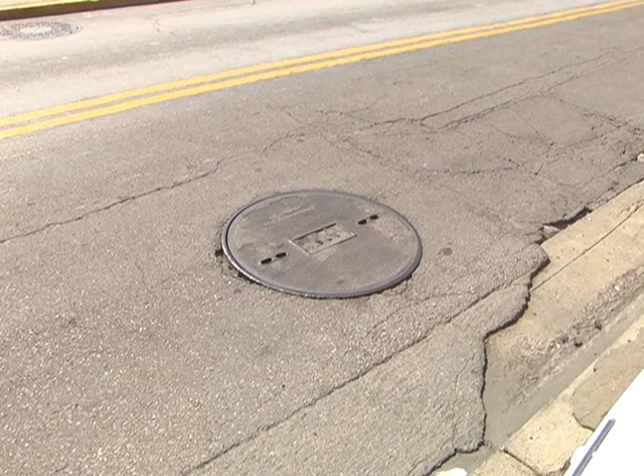When the Rupp Arena Task Force took a look at the arena and the district around it, one of the recommendations of Space Group, the planning firm that put together the master plan, was to restore and revive the Town Branch as a central part of downtown.

Picking up on where the task force left off and where that plan left off, the Downtown Development Authority invited qualifications from firms all over the country and the world to look into this issue for us. We had such a great response that over 20 international and national firms responded, so we pivoted a little and invited 5 of them to participate in the design competition.

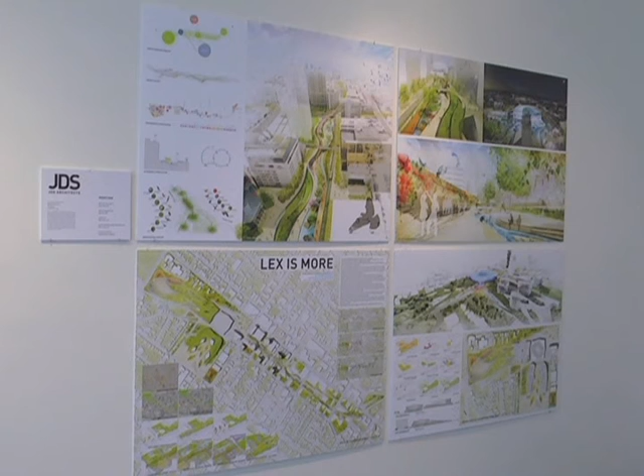They were given the brief in early December, and by the beginning of February, we had in our hands 5 exciting proposals for conceptually what it would mean to bring back the Town Branch downtown. The proposals ranged from putting the creek itself above ground in one continuous flow through the city, to reinterpreting it in various moments, to some massive architecture. But in the end, where we landed was Scape, a landscape firm out of New York City, which partnered with local firm EHI Consultants.

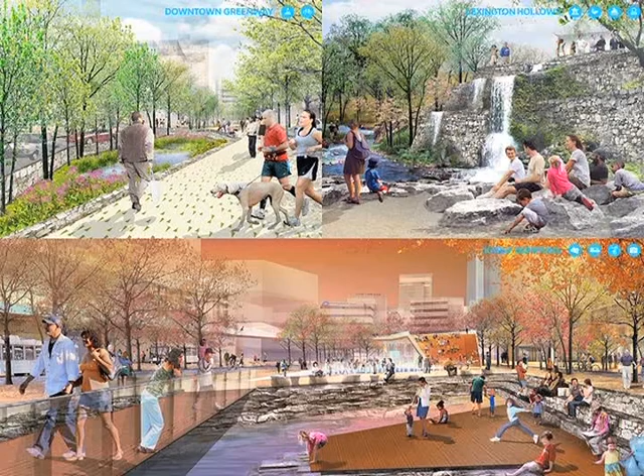They had 3 things that really pulled it all together and were the key pieces for why they rose above the rest of the competition. One was that they based the entire design on the karst limestone geology of the Bluegrass. The Bluegrass is a series of sinkholes and caves and springs, and creeks in Kentucky usually pop out of a spring, run downhill, dive into a sinkhole, and then reappear somewhere else. That mystery of water formed the basis for what they designed.

The second is that more than just create a pretty landscape feature, they actually designed a piece of green infrastructure. What we mean by green infrastructure is that in addition to creating spaces we would want to be in and tying the downtown together, this will also filter, clean, and manage stormwater in a way that helps the system and returns clean water back to our creeks. So in addition to creating great space, it has an ecological function as well.

And then finally, their design seemed right-sized for Lexington. We're a mid-sized American city, and they gave us a concept that could be implemented in phases, that was manageable, something that seems eminently doable, because almost the entire scheme is on either public right-of-way or public land. So there's a real opportunity here to pull this together and imagine that this is something we might actually build within the foreseeable future.

Isaac Murphy Art Garden at the top of Midland Avenue at Third, where Third turns into Winchester, near the Jif peanut butter plant. That's really the headwaters for the town branch. There's a spring near the peanut butter plant, and that's where the water first emerges.

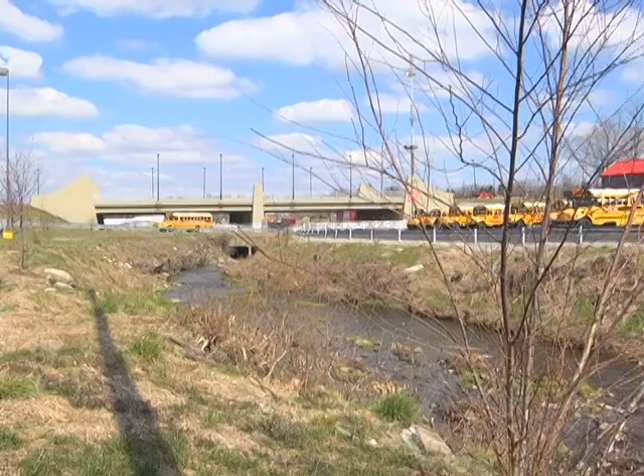The thing to remember about Vine Street is that it's at the bottom of the hill in both directions. So you've got rainwater running through downtown, through the neighborhoods, down to Vine Street and into the town branch today. It's just that the town branch happens to be underground. So the headwaters, though, are here at the top of Midland.

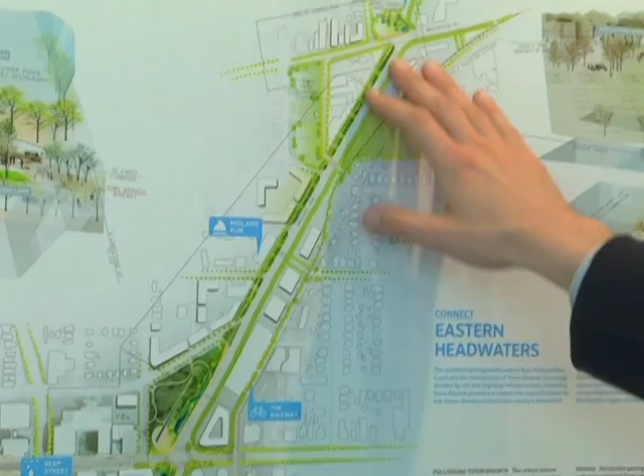The idea is to take the wide right-of-way along Midland and create what we think of as a typical creek—shallow, not particularly wide, but at wet times of year there'd be a lot of water, and at dry times a little bit of water. This would create a linear park, tie into the Legacy Trail, and set up a connector between the Legacy Trail and a bike path that would eventually tie into the town branch trail. So in addition to cars, you can now walk and bike this section of Midland.

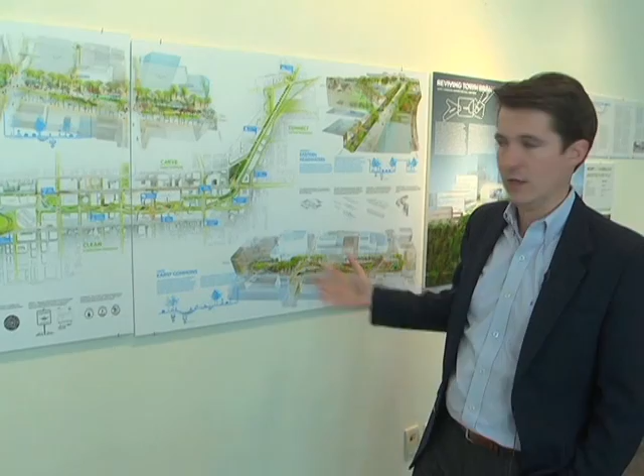It turns the corner around Main and Vine, maybe appears as a little bit more of a pool here. Then we get into what they call the Carve, probably the centerpiece, or one of the two centerpieces of the design. The idea is that what is now currently a parking lot along Vine Street, across from the Transit Center, behind the Kentucky Theater and the library and the Government Center, would be turned into a world-class public space.

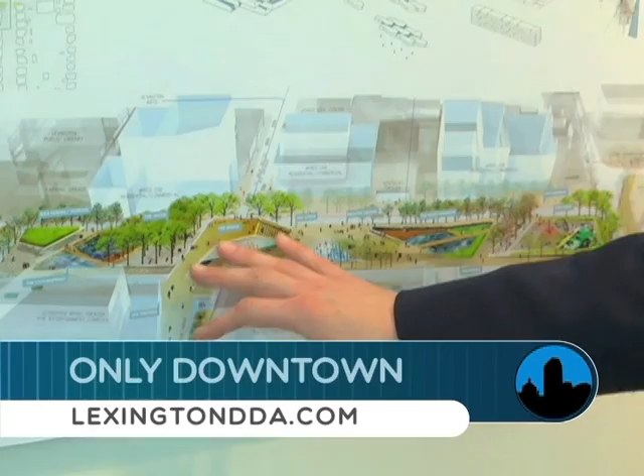You'd have playgrounds, a splash park for the kids, and what they call the Karst window, where you would actually see the creek flowing underground. There's also taking out the Martin Luther King overpass and turning it into a pedestrian overpass so that you create a bookend between downtown and UK along MLK.

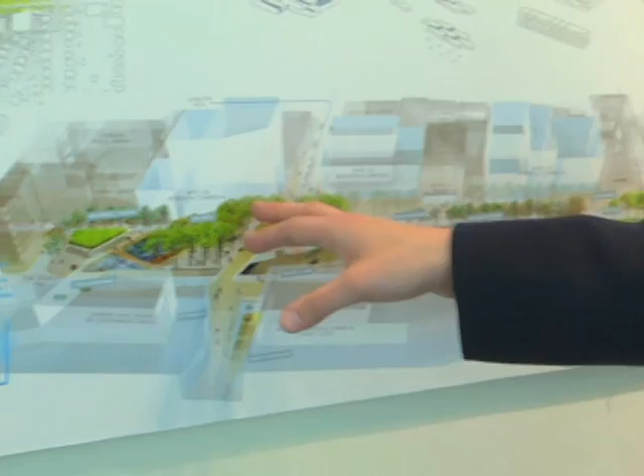Really taking what is now lost space and the backs of buildings and creating a world-class park that also provides economic development opportunity overlooking the park.

Down Vine Street, the design really takes into account the fact that Vine Street right now is kind of a speedway, and that much of either side of the street is dedicated to either parking lots or parking decks. So the idea is to create a median that would continue this pedestrian bike path along Vine Street.

Until we come to the renovated Rupp Arena site, incorporating the existing Triangle Park, coming around, and then the water ducks back underground and emerges dramatically as a waterfall behind Rupp Arena, opening up into this field that we don't have right now.

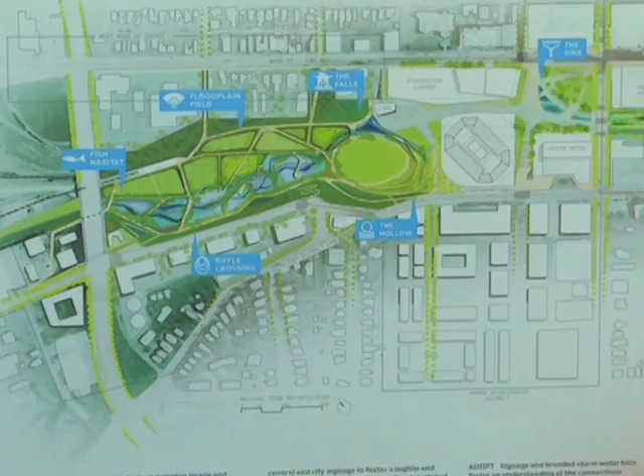It's a beautiful interpretation of the Cox Street lot, which is currently a giant parking lot, but a giant parking lot with a floodplain in the middle of it. Utilizing the existing floodplain as ball fields, recreation fields, forest, giving us a park that we don't have now in downtown or anywhere near downtown—one that would become the anchor for both the renovated arena and the new convention center and new development along the park's edge.

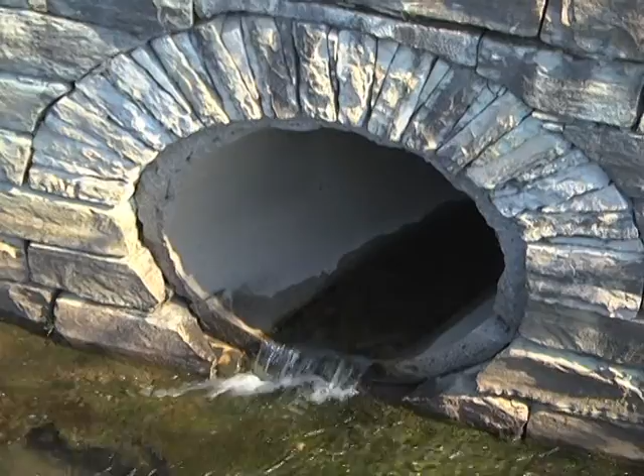Until finally the town branch, at this point, having gone through filtration and various cleaning and management along the way, the creek is daylighted, comes back to the surface, ties into the town branch, and continues to flow to Elkhorn Creek and eventually to the Kentucky River.

That's the general gist of the concept. As we look to the future, what comes next is that the competition allowed for us to receive five conceptual designs.

We were very impressed with the amount of work that went into this design. There was still work to do—we've got to figure out some of the engineering questions, figure out a few more of the traffic questions, but overall, this is a great place to start. In the next phase, we will begin to answer questions such as how do we implement this, what is the phasing we can do, and what's it going to cost. But this is a great place to start.

I'm excited to be here.